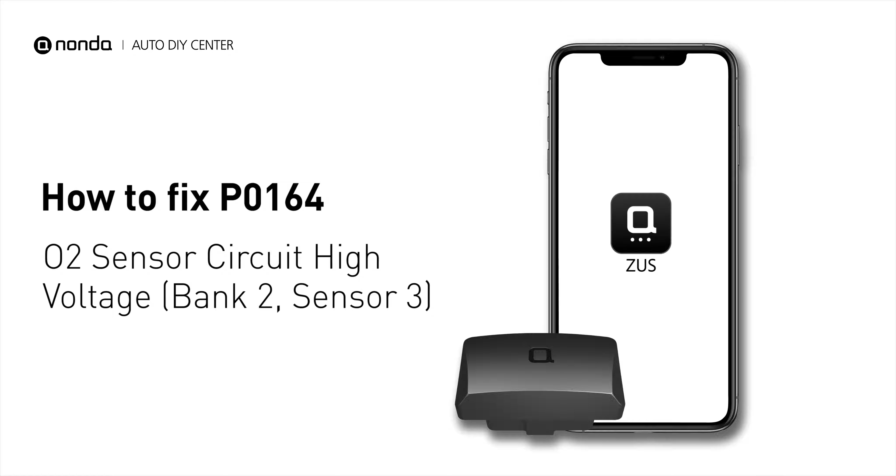If you are getting a P0164 error code, this video is going to show you two practical solutions to fix the error code at home. Use the ZUS app to scan your vehicle and see the error code P0164.

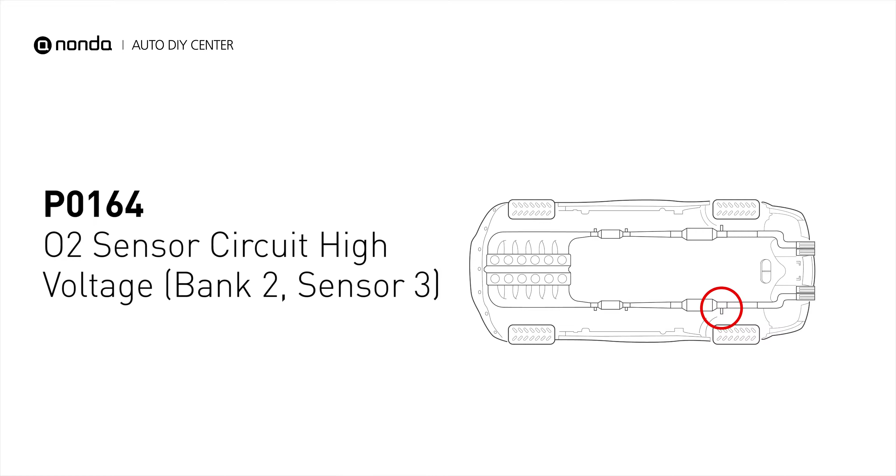It indicates that the engine control module has detected excessively high voltage from the Bank 2 Sensor 3 oxygen sensor circuit. Here are two simple DIY methods you can try to solve this problem. Method A, fuel injectors.

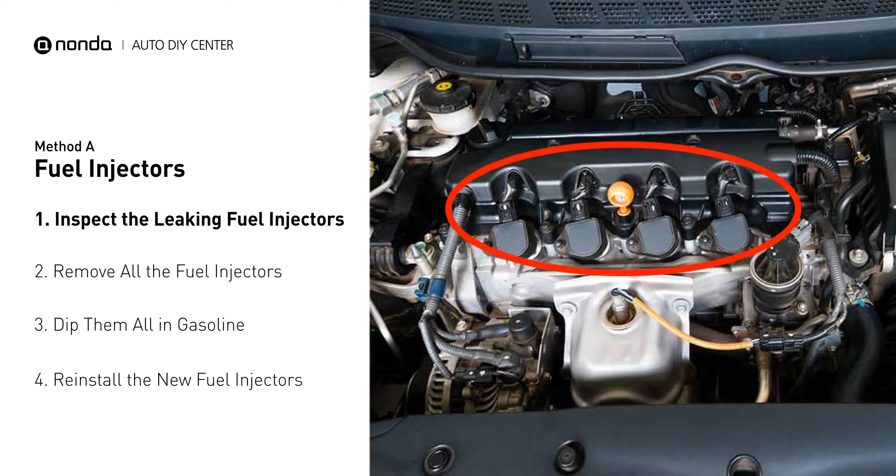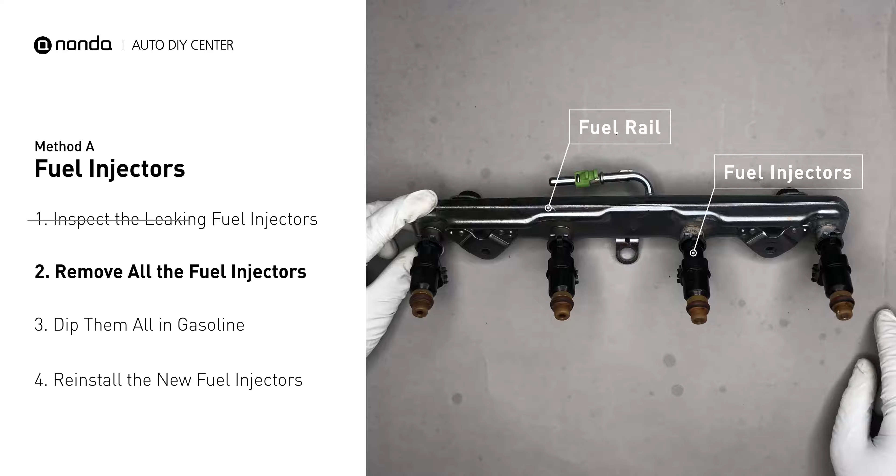The fuel injectors are mounted in the intake manifold so that they spray fuel directly at the intake valves. Inspect the leaking fuel injectors on the fuel rail. Carefully remove the fuel injector. Make sure the new injector has new seals, and never reuse the old seals.

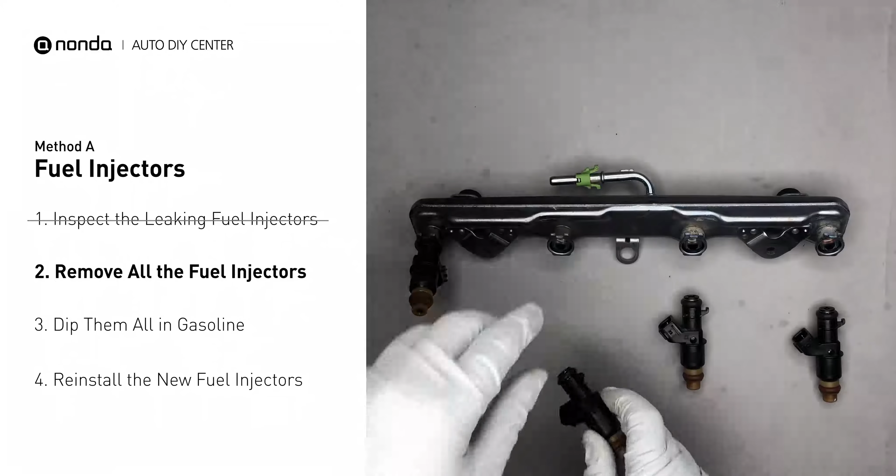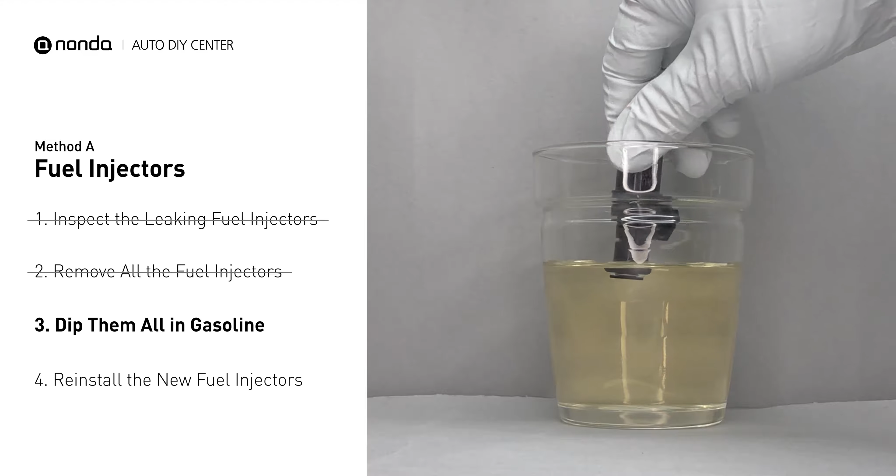When you change the fuel injectors, change them all as a set, otherwise the engine will run unevenly. In order to prevent leaking, get some gasoline, put it in a cup, and then dip the new fuel injector into it. So the seals get wet with gasoline, and it will go in and won't leak. After all, just slide all the new fuel injectors in.

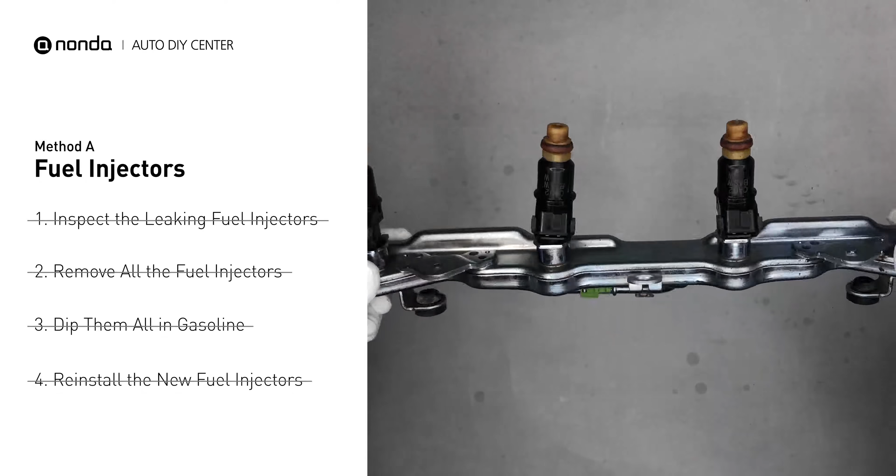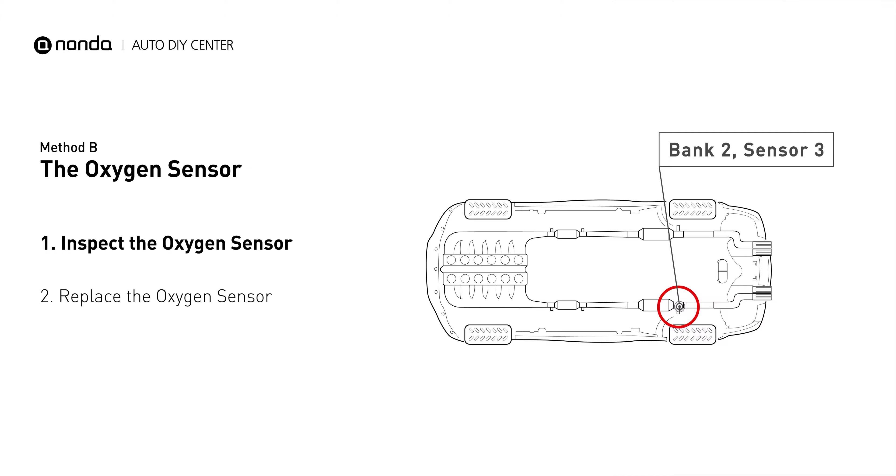Method B, the oxygen sensor. This oxygen sensor is located right after the catalytic converter. Bank 2 is on the side with the cylinder number 2. Sensor number 3 is downstream of the last catalyst in the exhaust system.

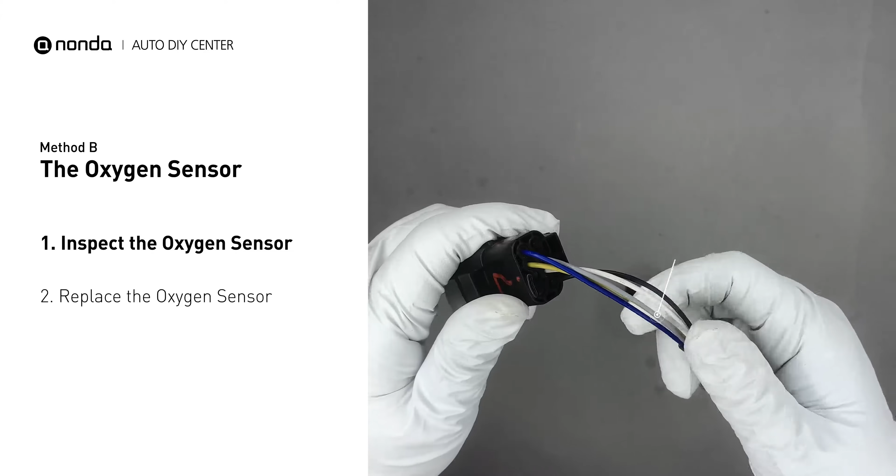Visually check the oxygen sensor's electrical connections, wire harness, and metal tabs for any damage. If damage is found, then replace the oxygen sensor.

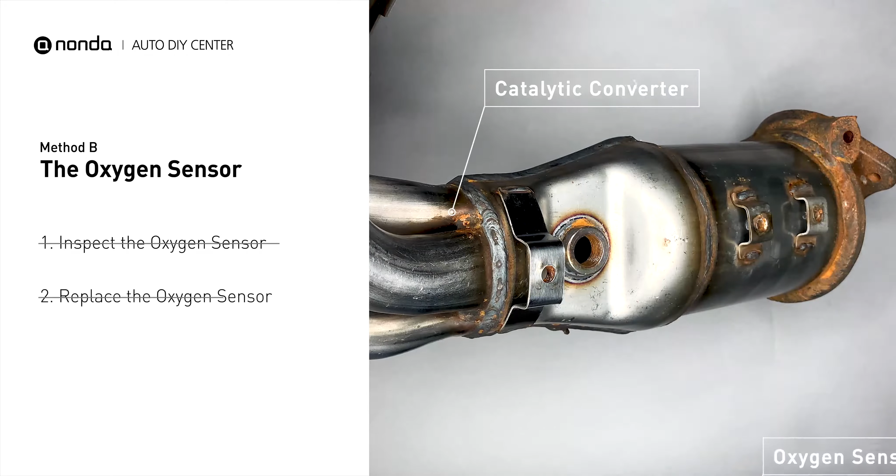So here are two of the most practical solutions to fix the P0164 error code. After the repair, you can now use the Zeus app to clear the error code, and tap the rescan button one more time to make sure everything is fine with your vehicle.